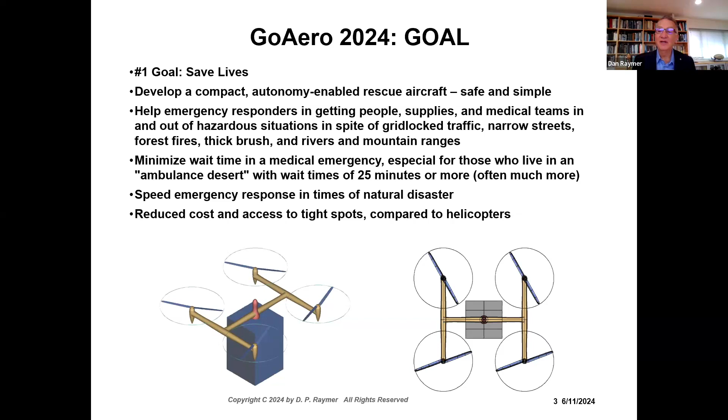And of course, the obvious comparator is helicopters. I spend my summers in Sweden on an island, and the only access in an emergency is helicopters. I often get an air show with helicopters flying right over my house on their way to pick somebody up. Once they had to pick up the next door neighbor, an old fellow with heart trouble, at 3 o'clock in the morning. They were hovering over my house at something like 20-meter altitude, very low, blowing all the leaves around and waking us up, with lights everywhere. They were looking for a place to land and literally couldn't do it. I ran out in my pajamas and made arm motions, waving them toward a parking lot where I knew they could probably land.

So anyway, it sure would have been nice if they had some way of getting into that area. This is one of the scenarios: trying to bring somebody in from under a forest canopy, which was the problem over in Sweden. You have somebody who needs help, and some kind of VTOL vehicle, but you have trees in the way. So you want something that can go around and hopefully land near the person, not on top of them. That's the basic idea.

Drowning victims, douse a nascent wildfire - I had to look that one up myself, maybe you too. Not a word we always use, but it means a wildfire that's in the process of growing. So that's the kind of things we're talking about. I think you all know that.

There are 3 missions defined in the requirements, and you have to do a good job of all of them. You've seen this picture out of the requirements, and I'm sure you've been going through that probably far more than I have, so you have to design in response to those missions. You probably saw this also, but the ground vehicle is part of the whole competition, and coming out of the ground vehicle and setting this thing up for flight is a part of the competition. So it's not just the flying machine.

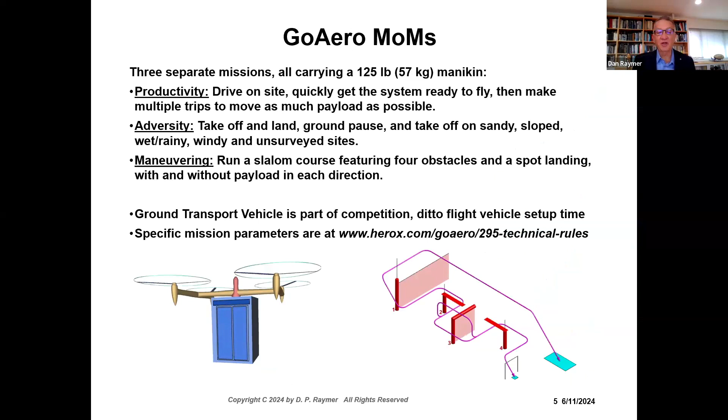Okay, design process and sizing. I did show this chart last year - I don't know if any of you were looking at it, but this is kind of how we do these things. We start with objectives, missions, and design requirements. We also gather a whole lot of information. Let me see if I can get a pointer going here.

We also have a lot of information gathering that we have to do before we can seriously start designing. Then we start designing, we look at concept sketches, we make some calculations. It might be just pure statistics, or it might even be a smart person who says well, it's going to weigh about this much. Or we can do some math, which maybe is a better idea. But somehow we come up with an estimate of the vehicle weight, and that includes the actual mission sizing. It includes calculating the thrust to weight required, the power required from that.

TLAR, that's an acronym for 'that looks about right.' And if you have somebody very experienced on the team, sometimes it's better just to start with something that looks about right. Then, once you have an actual design layout, even if it's wrong, you can analyze that and optimize it.

So the next step is to actually get an initial design layout, whatever design we think will work. In fact, it's a good idea to have 4 or 5 different designs when you start out. Don't start out thinking 'I know what the right answer is.' Start out thinking 'well, I'm not sure what the right answer is.' Let me look at 3 or 4 options, maybe 5, maybe 6.

This is an actual scaled layout, properly scaled. These days it's always in a CAD system, always in full scale, but all the parts are the right actual size. And you need the major parts.

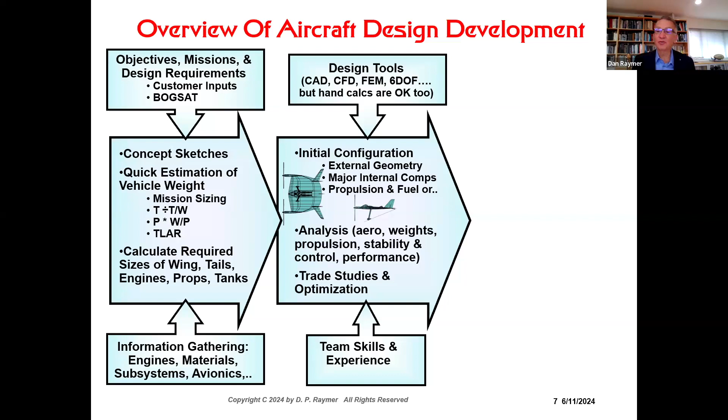You also need to input your team skills, and hopefully you've got some people with skill. And if not, hopefully you've got some people that can learn from history and read and find out what's worked before and what doesn't work. Don't be limited by what's worked before, but don't be ignorant of it either.

And then from that, you come up with a final concept, you redesign it, do a final pass of analysis and that sort of thing, and build it and test it. And of course, you need to have a fabrication shop.

During the design process, you have to have a pretty good idea of what you can make. It doesn't do any good to come up with the very best design ever if your team cannot make it in the time allocated. So you need to be pretty careful of that and have a good idea of what you can make. You might prefer to use all composites, but you might not have the ability to make it—but you can buy some sheet metal tools and make it out of sheet metal. That's going to drive your answer. Find that out early in the project, not towards the end.

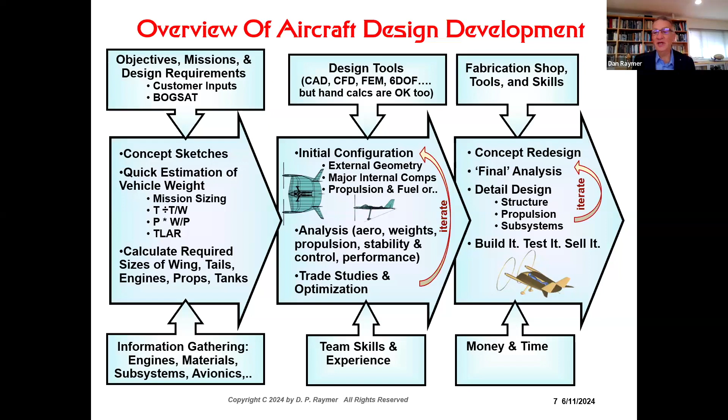And of course, you've got to put a lot of money and a lot of time into it. So that's basically the design process that could be applicable to really any type of aircraft, but certainly this one. Okay, I want to talk about sizing.

People who aren't in the aircraft business, or have never done it before, have the idea that you draw something really cool looking and then calculate how far it goes, how long it flies. You can try that if you want, you might get lucky. You can try that and then plan on iterating 4 or 5 times.

But another thing you can do is start with some fairly simple math that'll tell you about what the aircraft should weigh to do the design mission. Now, it's doubtful that very many of you are going to look at a fuel-burning option, but if you do, this is directly appropriate.

But even if you're going to be using an electric option for your propulsion, let's walk through this because I can show the sizing method and then I can show how it's different for electric. You'll go, oh, okay, that's easy. You make this small change.

So for a fuel burning aircraft, we start out with a very simple equation. The takeoff gross weight W0 is the crew weight plus the payload plus the weight of the fuel plus the empty weight. And to get an easy equation we can solve, we assume that the fuel weight and the empty weight can both be expressed as fractions. So there's a fuel fraction, WF over W0 times the takeoff gross weight, that gives you the fuel. Empty weight fraction times the takeoff gross weight gives you the empty weight.

Okay, so that makes a simple equation and it's now easy to solve. I just move stuff over and divide, and I wind up with an equation that's the takeoff gross weight is the weight of the crew plus payload, whatever you're carrying, divided by 1 minus the fuel fraction minus the empty weight fraction. When we talk about electric aircraft, it'll look just like this, but that fuel fraction term will be replaced with a battery fraction term. So hang on for that, we're going to talk about it.

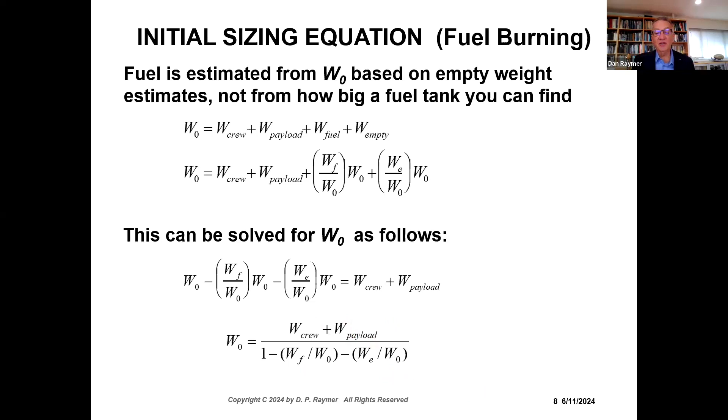All right, so where do I get the fuel fraction? Where do I get the empty weight fraction? Well, the empty weight fraction is primarily found from empirical methods, basically. Before you've drawn the airplane, certainly, you can't add up the weights of the parts. You haven't even drawn them yet.

There's something called minimum gauge structure that impacts this. But the biggest thing that impacts this is that there's a lot of fixed weight items that don't have to scale. They don't have to get bigger if the airplane has to grow to get more range. So if you've got a pilot sitting there in a seat and you find that the airplane has to grow, the seat doesn't have to get heavier. The avionics don't have to get heavier. The radar doesn't have to get heavier. The engine does have to get heavier. The structure has to get heavier.

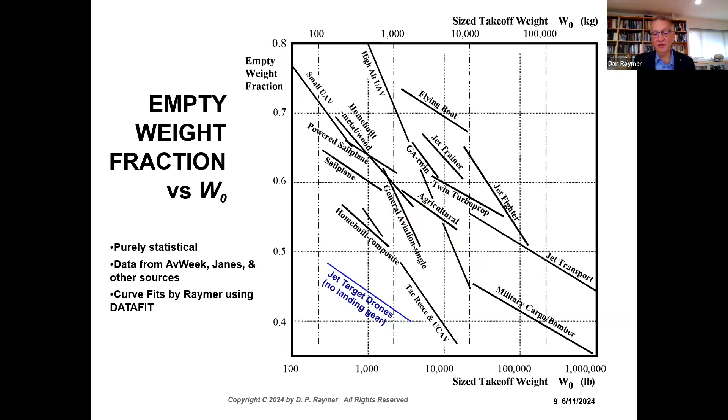And then when you've actually drawn the airplane, you can do the calculation of the components and peg a point on this chart, and use that to come up with a historical relationship. Okay, so that's empty weight fraction.

What about the fuel fraction? Well, the fuel fraction is found by going through the mission and finding how the weight of the airplane changes through each part of the mission. Again, we do this in the 5-day design class. Let me skip the details and jump to the cruise weight and the loiter weight, which are typical. There are all sorts of different mission segments, and you can find out about those later, but I just want to give the flavor of it.

Anyway, when it comes to the cruise weight, we're looking for how the weight of the airplane changes. So we have some ratio of the weight after the cruise in the numerator, divided by the weight before the cruise in the denominator. And we find this equation by going back to an old equation called the Breguet range equation.

This was derived about 100 years ago, and it gives you the range if you know the velocity, the engine's fuel consumption—that's specific fuel consumption—the lift to drag ratio of your airplane in forward flight, and a log of the weight ratio, how the weight changes during that cruising portion. We simply solve for that weight ratio. That's where this equation comes from.

So we can find that weight ratio, and all we need to know is the range, this engine characteristic specific fuel consumption, velocity, and lift to drag ratio. And of course, there's a lot more that goes into this, and how you get all those is another story, but we'll skip that for now. That's basically how this all works.

There's a few caveats when you're doing the calculation. Make sure you're using consistent units. And if you're using metric units, make sure that you take into account the difference between mass and weight, of course, which is a force. We often get those confused when we're talking in metric. You shouldn't, because metric is better—it's in the British imperial units where you have pounds force and pounds mass. The confusion in metrics is you have to make sure you put in that 9.8 factor in the right place.

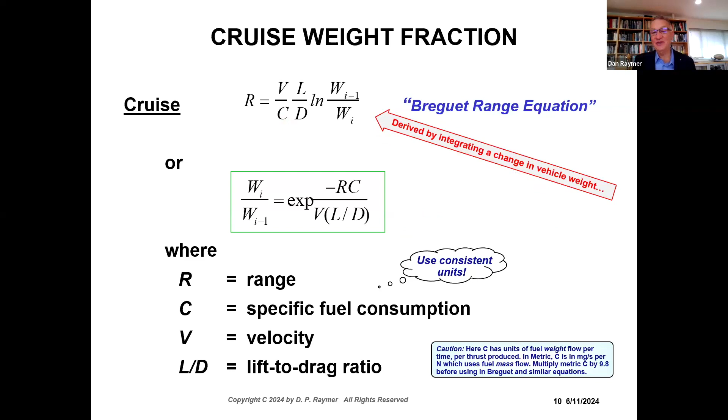Okay, now notice that this cruise Breguet range equation is found by integrating the change in vehicle weight. When we get to electric aircraft, the aircraft weight doesn't change, so you can't use this equation—that's the big difference. But otherwise, it actually looks very similar to this method. So that's the basic sizing process.

Okay, so thrust. Thrust matching—we're trying to find the thrust required in flight. For a normal aircraft, there's cruise and climb, which typically are the worst case. For a vertical takeoff aircraft, you also have the thrust to weight required for vertical flight.

So in cruise, a very nice equation—a lot of people don't realize, but if you think about it, thrust equals drag in cruise, and lift equals weight, and I can combine those two equations. I get a very interesting result, which is the thrust to weight required in cruise is 1 over the lift to drag ratio required in cruise.

And you get the L over D from a very detailed aerodynamic analysis, but there's also a rather simple method. I didn't bring it today because I just don't have that much time. But if you go to my book or my short course, you'll find this very simple method of estimating lift to drag ratio in cruise. And once you know that, you know the required thrust to weight in cruise.

For climb, you have to add the component of the aircraft weight vector in the thrust direction. So you make a little vector diagram, a little picture of an airplane, and you find that the thrust now equals the drag plus the weight times the sine of the climb path angle.

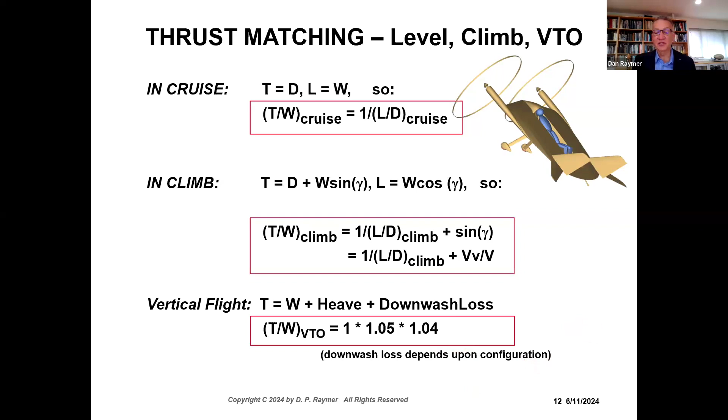Okay, I'll talk about propellers. There's a common misconception or misstatement that a propeller turns power into thrust. That's ridiculous - the units are wrong, it's apples to oranges. Instead, a propeller turns power into power, from the shaft power of your motor to thrust power, which is always force times velocity.

We don't do a perfect job, so there are some losses as we do that. So we've got this invented term eta sub p, which is basically just a loss factor. It says my propeller throws away some of the power of the motor, so I get a little less thrust power out of that. So we solve this equation for thrust - you've all seen this before. That's where this equation comes from. It's nothing fancy, it's just pure physics of turning power into power.

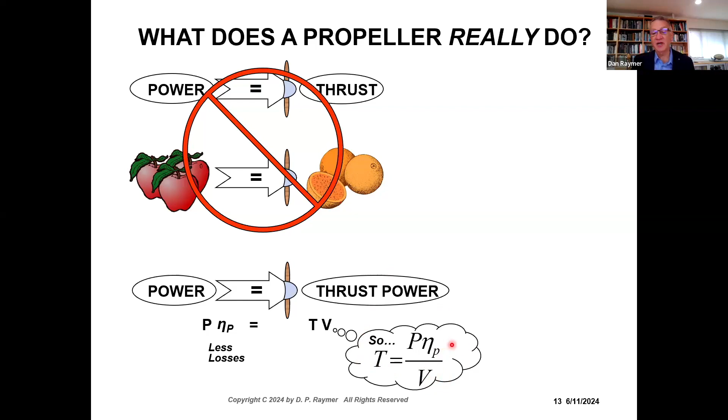The obvious problem here is in the denominator, this velocity term. The faster you go, the lower the thrust. That's why propeller-powered aircraft don't go that fast, because as they go faster, they get less thrust. Even if the efficiency is ideal, even perfect, you still lose thrust with increased velocity. But in the real world, when you get fast, especially near the speed of sound, the efficiency drops as well. So this is why propellers don't do so good near the speed of sound, and you've got the combined effects.

So how do we calculate that? Well, there's a bunch of historical data, test data, tons and tons of it, so you don't have to reinvent this. You can go into test data, and there's various charts and graphs. You have to read the chart and graph to find out how to use it - it's like a little cookbook. It says calculate one magic parameter, read off here, it's another magic parameter, solve for what you're looking for. It's not that hard. That's what you do in forward flight.

You can also, of course, write equations. There's various software you can find that does a good job. Now you can design a better propeller - you can actually do better than these historical terms. If you design your own propeller and you know what you're doing, do watch out: a lot of times propeller codes wind up being a little on the optimistic side compared to what you actually get when you build it. And you have to build it perfectly, with no other factors that you didn't think of.

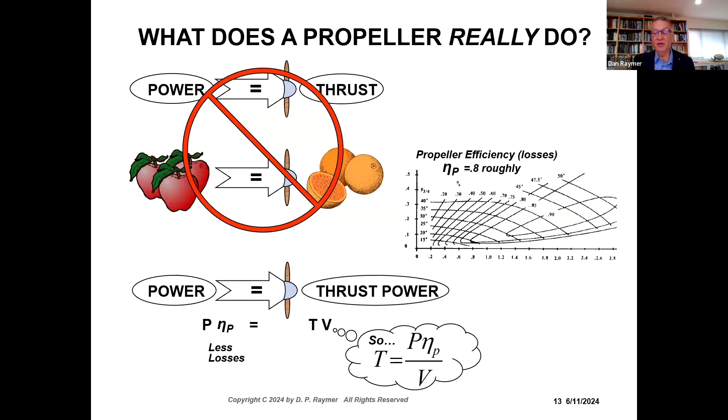And there's all kinds of extra losses that might not be included, nacelle blockage terms and things like that. So be careful, but typically this is how you calculate it.

Now, if the velocity is zero, you have another problem, and that is that this implies the thrust goes to infinity. Go back to here. This equation, velocity 0 means thrust is infinity. That's not going to happen. So something different is going on.

Basically what's happening is that the physics changes. At these very low speeds, the propeller is actually pulling air into itself, just like a fan sitting on your desk on a hot summer day. It pulls air into itself. So the velocity isn't ever actually 0. So this equation isn't applicable at 0 because the velocity isn't 0.

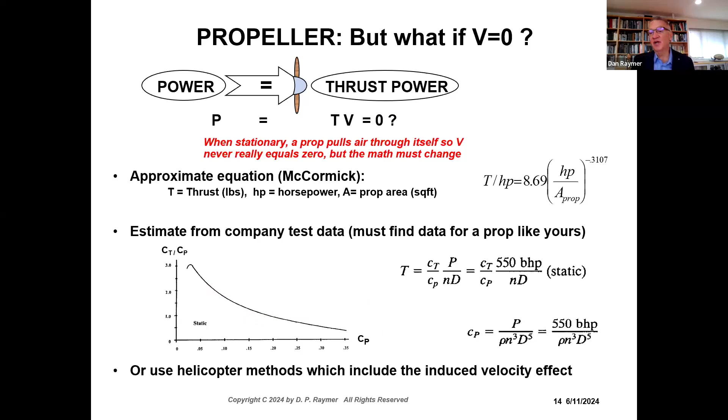So you can either use test data—there's all kinds of charts and graphs that show you what static thrust you get from a propeller. This is typical, it's the one I typically use. Or you can use more complicated methods developed for helicopters, where they actually include the induced velocity effect and solve from that. A little more complicated, not necessary. Anything over about 50 knots, you're just fine with the usual forward flight equation. But if you want to go static, like anything hovering, then you've got trouble.

Okay, ducted fans. People like ducted fans a lot. I'm kind of running out of time, so I don't want to spend too much time on it. But the basic problem with ducted fans is the efficiency gain you get compared to an unducted propeller is only true if you have the same diameter. And a lot of times people forget that. They show a little ducted fan like this and think it's going to have the same efficiency as a propeller that's this big. That's not true. It'll have less efficiency, much less, depending on the circumstance, of course.

So you have to watch out for that, make sure you're not fooling yourself. And also in forward flight, the benefits of a ducted fan tend to go away because of the drag and other effects of the duct itself. And also you have the weight of the duct. So I'm not saying don't use ducts. I'm just saying be careful, know what you're getting into, and know what the problems are.

It's difficult to manufacture and operate a ducted fan because the clearances have to be extremely tight. You're building up high pressure behind the duct. If the clearances aren't tight, a lot of the air just zips forward around the propeller, and it's a loss. So the clearances have to be very, very good, which means this has to be very well constructed, very well stabilized in its central location.

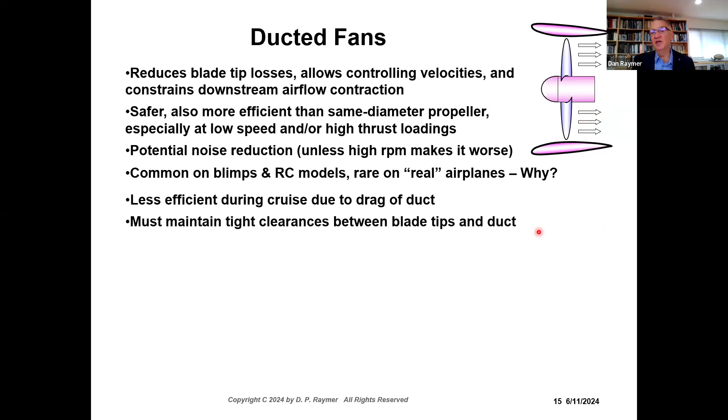I saw one guy that took a propeller and got a plastic garbage can and cut a ring out of it and stuck it around with a huge gap, and showed it to me very proudly, saying, there, I'm going to get more efficiency from that. No, you're not. No, you're not.

Okay, so anyway, my opinion, in forward flight, the ducted fan advantage disappears by 100 knots, and maybe 50 if everything is considered. Now that's for a big aircraft. If you're doing little model aircraft, there are other advantages. I won't go into it too much.

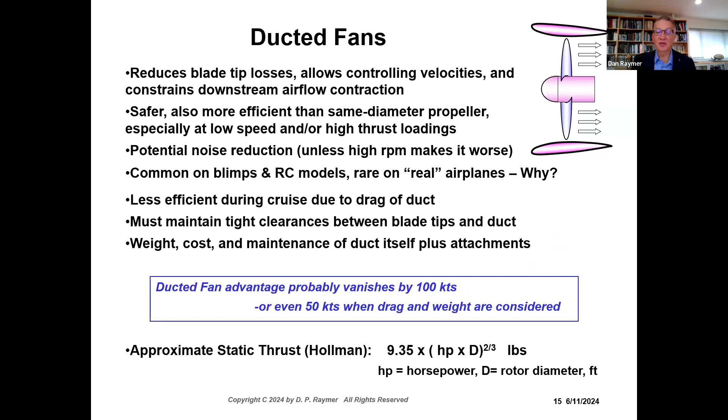Hollman's book has a static thrust approximation. I don't know where he got that, but Hollman's a sharp guy, so it's probably usable.

All right, electric aircraft analysis and sizing. Let me talk about that and show you some of the equations and how this differs from a fuel-burning aircraft.

Why do we like electric power? Well, about 20, maybe 25 years ago, I put this chart together. It was maturing fast, it's still maturing fast. It's not as far as I hoped we would be by now. Most of the difference from what we hoped 20 years ago to what's happening today is in the batteries. The batteries are much better, but we were hoping for even more. We'll get there eventually, but it's tough to really put a lot of energy into a battery without other things happening.

Okay, but other than the power supply, I made this little gag cartoon here 20 years ago showing the big problem is that extension cord. But otherwise, we love electric motors. They're very reliable, they just last forever. They're very smooth, they start up, they don't worry about icing or things like that. There's a lot of good reasons for it.

The motors themselves are very lightweight. They're actually very efficient. The electrical power that they get, they lose very little of it in delivering it to the shaft. Then, of course, you still have the shaft to propeller connection. The propeller itself loses some of that power, but the motors are very efficient at delivering power to the shaft.

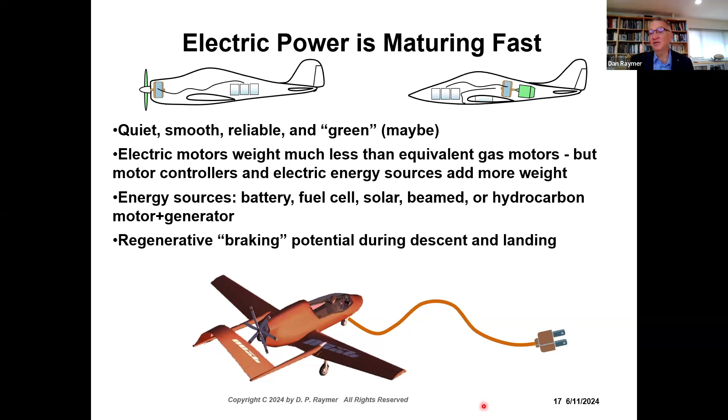There's also a possibility of regenerative braking. You could possibly run those as a generator and stay high all the way until you got to your destination, then dive down and gain back the energy needed for landing. Maybe—at least the words are there. It might be possible. Okay, but the problem is the power supply.

And here's another old chart. This one comes from 2002. Hasn't changed all that much. We're looking maybe a little bit better—I've added these dotted boxes. I think we're about that much better.

But you also have to really watch out when you're talking about a battery, because you'll very often see some great announcement—a startup company or a college professor has come up with a great new battery technology—and they tell you these wonderful numbers, and it's like, yay, finally electric motors can compete with a tank of gasoline. And it turns out that was for a single cell, not a fully installed battery. It didn't include the casing, didn't include whatever electronics are required. And by the time you put all that in, oh, and it was optimistic also, by the time you put all that into an actual battery, it's, if you're lucky, an incremental improvement.

We're still not seeing that great breakthrough. If we get even 500 watt hour per kilogram in the actual installed battery, with everything taken into account, that'll be wonderful. And if we ever double that, that'll change the world. But as of now, it's still not really competitive.

By the way, the comparison with gasoline here includes the knockdown for the internal combustion losses. So that's basically delivered shaft power coming out of a tank of gasoline, not the actual chemical content of the gasoline itself. And a tank of gasoline is far better than anything from batteries. So just watch out for this.

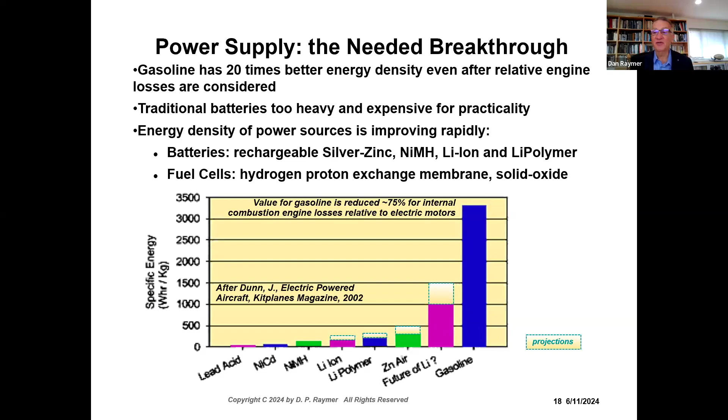Okay, range and sizing and actual calculations. First of all, as I said, you cannot use anything like a Breguet equation because we're not integrating a change in weight. I mean, Einstein says there's a change in weight, but not enough to integrate.

We can do this backwards. As I said, you can just sort of eyeball something. You can pick a motor—gee, I like this motor. You can calculate the weight to motor ratio. This is like a ratio, the takeoff weight to power available. And you can compare that to history and sort of pick one from history.

This then will tell you what the weight has to be. If you've already picked the motor, you know the power, you pick this ratio, and it tells you what the weight has to be. Draw an airplane from that weight, analyze it, see if you get the range you need, and if not, change it. You can do that—there's nothing wrong with that approach. Sometimes I do just that when I'm in a hurry.

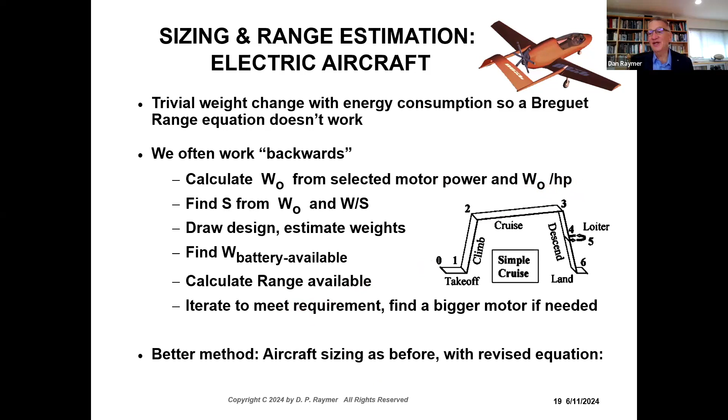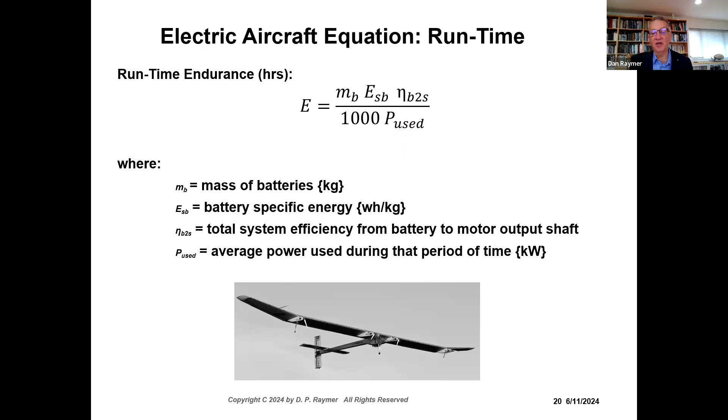I can do the same thing for level flight. I can calculate the range I get by writing down the equations that tell me how long it takes to go that far. And then I go back to this endurance equation to calculate the power setting required for cruise, and if I take the power setting required for cruise, put it in that previous equation, solve for terms, I can get the range out of that aircraft.

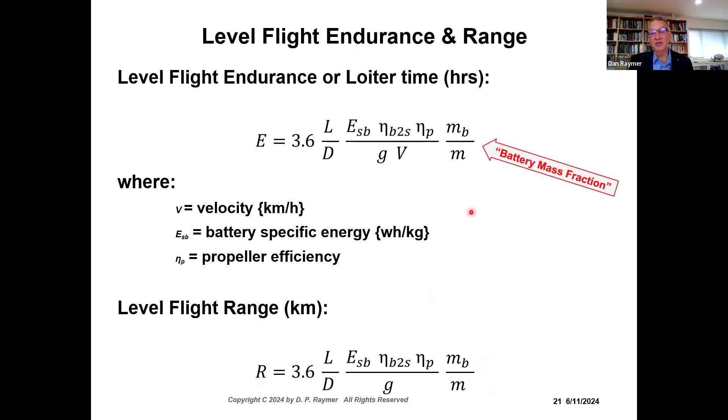And once again, I can collect terms and I get this ratio, battery mass to vehicle mass. This MB over M we call a battery mass fraction, and I can turn that around and solve for the battery mass fraction. So here it is solved for loiter, here for cruise, here for climb, and I can solve it for other things—I can solve it for hover, or just basically solve it from the runtime equation, power setting required.

So from the combination of battery mass fractions, I can combine them together into the complete aircraft battery mass fraction. And I start with a completely different derivation, and I wind up with this equation for the takeoff gross weight. This is the sizing equation for battery-powered aircraft, and it looks just like the fuel aircraft. It's derived in a completely different way, but it winds up looking just the same. Of course, the fuel fraction is replaced with the battery mass fraction.

Here's the peculiar thing: when you go through all the equations, you realize in this case the battery mass fraction is not the product of the individual terms, it's the sum of the individual terms. So you find a battery mass fraction required for loitering as long as you want to loiter, for cruising as far as you want to cruise, for climbing, and anything else like hovering, and you add all those together, and that gives you this battery mass fraction. So that's how you do the sizing for an electric powered aircraft.

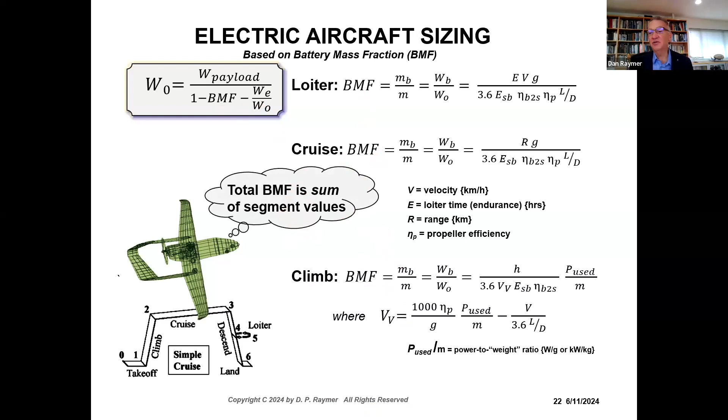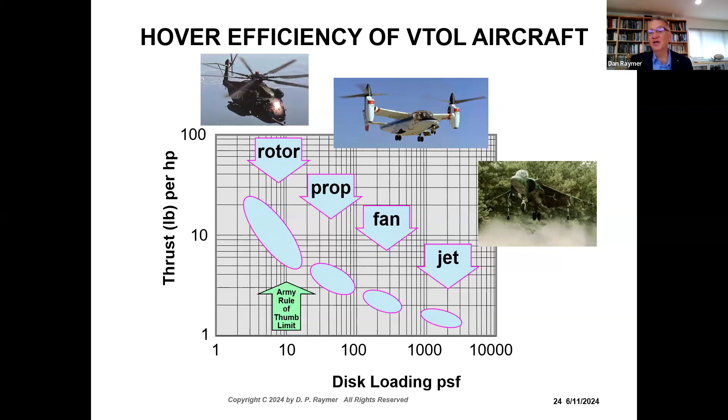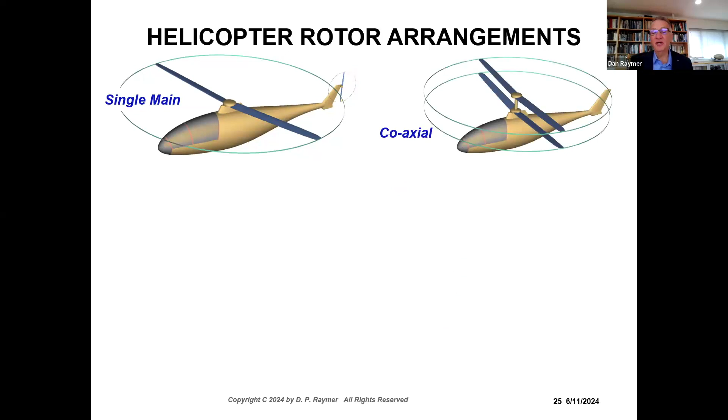Various different helicopter arrangements. A single main rotor tends to be the lightest weight and probably the most efficient. The problem with a single main rotor is that you've got to do something to take care of the torque. When you apply power to rotate the rotor to the right, the nose of the vehicle goes to the left, or vice versa. You typically lose a lot of your shaft power spinning this little tail propeller to provide a moment - something like 10, 15, 18% of your power. So there have been other approaches to avoid that: coaxial, tandem, side-by-side tandem. They all try to avoid that problem, but they all have their own new problems, extra weights, efficiency losses, etc. I think the single main is the winner in the end, and the vast majority of helicopters have been single main, but there's always good reasons to look at one of the others.

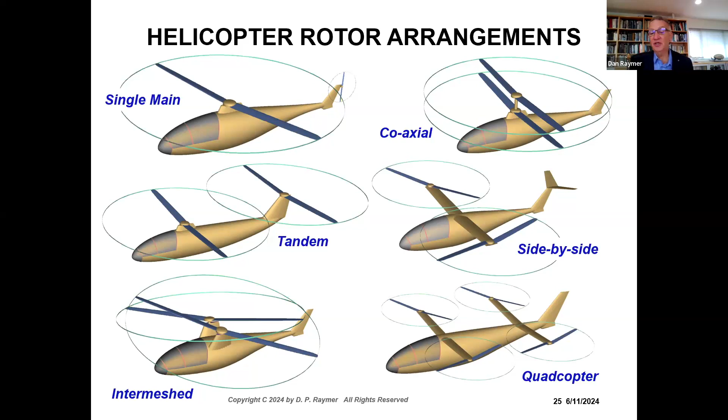Do a trade study. There's also intermeshed rotors. And there's one called a quadcopter, which has come along more recently. It's actually very old, going back I think to the 1920s. But today you see them for all the little electric powered drones, including little toys that cost 20 or 30 bucks now - it's amazing how tiny those things are. This can be used to solve that torque problem by having them spin in opposite directions. In fact, you can get the yaw you want from the torque, and it works like this.

Basically you have these things set up so they're spinning in the same direction kitty corner - the right front and left rear, and the right rear and left front. If you increase the power on this pair and reduce it on the other pair, you yaw to the left and vice versa. You get roll, pitch, and yaw by changing the amount of thrust going front, back, left, right. If you don't get enough yaw - which is likely if you have a big tail in back and a wind blows you - you can put these things at very slight angles from the front that give even more yawing authority, with only a very slight loss in vertical thrust. So this is a very common thing that we do now.

If you want redundancy, and you probably do, you can either have 8 of these things scattered around the vehicle on completely separate power supplies, or you can stack them vertically, having a quadcopter where each rotor is actually two - one on top and one on the bottom. That's also a very common arrangement.

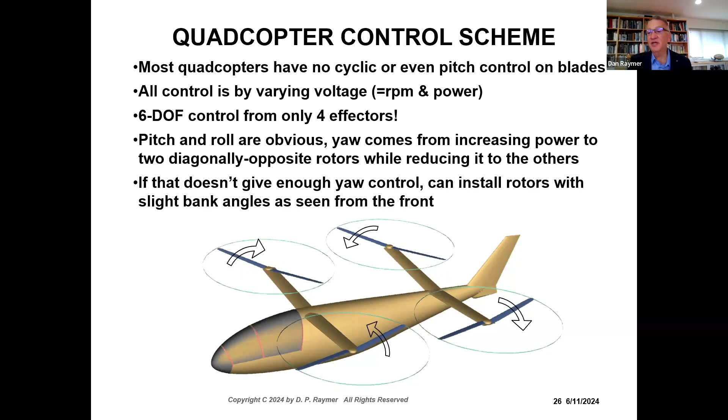Last time I looked, somebody had a patent on that and they were enforcing it. I can't imagine that's patentable, but you never know these days. So watch out if you're going to start your company - make sure that isn't a problem. And by the way, if anybody knows if that's not a problem, let me know. Send me an email, because I haven't seen where that's been resolved.

We can rewrite the equations for thrust, as I said, in a form that doesn't have a problem when you get to zero velocity. So what we have to do is take into account the velocity. And here I have just an arbitrarily chosen name.

I call V1 the velocity right at the disk. V0 is far above, and if I'm hovering far above, it should be 0. And down below is some downwash velocity, V2.

I can go through the usual development where I'm setting the thrust and kinetic energy and equating, go through the whole thing, and find an efficiency and all sorts of things. The one I'm looking for is down here. I can calculate the thrust, determined by that velocity induced right at the disk.

And I can solve for that velocity. It sounds like a weird way of doing it, but I can solve for that velocity, and that tells me what that velocity has to be for a given amount of thrust divided into a given rotor disk area.

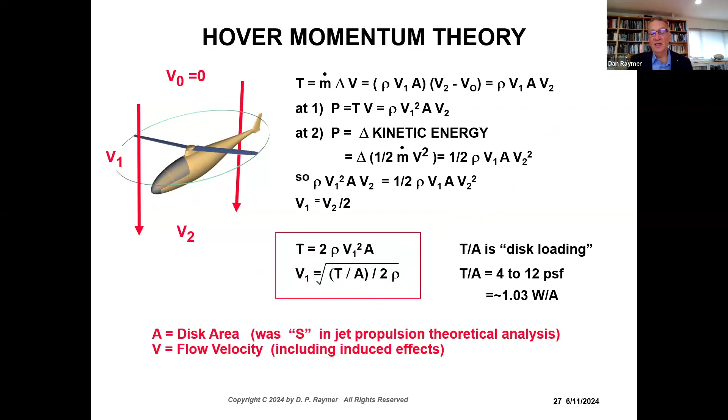And then I can use that to calculate the power required. So I wind up getting the power required as thrust times velocity, and it looks like this. And if I'm hovering, my thrust has to be about equal to my weight.

So we can now calculate the ideal thrust. This very simplified analysis doesn't take a lot of things into account, but it's a very common classical analysis. And typically you get 15 to 20% less thrust. 17% is a good approximation, less than predicted by this method.

So just knock it down, or increase the power required a little bit, and that'll tell you how much power is required for hover. Add to it to take into account that 17%, add to it for the downwash that we talked about, and add 5% more for vertical acceleration.

It doesn't do this helicopter any good to hover. He wants to go up. So you need 0.05 G extra thrust to go up.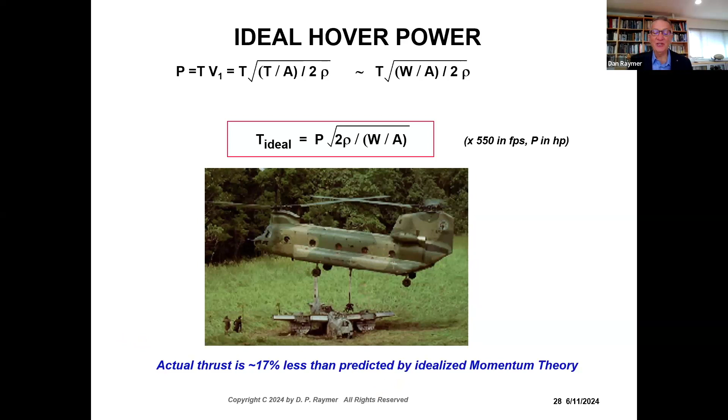In forward flight, you can actually treat a rotor or disc, or some kind of helicopter vehicle, like an airplane. If you're moving fairly fast forward, then the disc of the rotor actually acts like a weird wing.

There's oncoming air, the air is turned downward, there's a downwash behind it, and there's a lift distribution across the rotor disc. If you kind of squint, it's a round wing.

So you can actually apply the same methods we use, including Oswald's efficiency factor. The aspect ratio, do the math, it's 4 divided by pi. And typically your equivalent Oswald efficiency is pretty terrible, around 0.6 to 0.7.

So you can use, I don't know, I'd use 0.65 maybe as your Oswald efficiency factor. That'll tell you what the drag is in forward flight, and you can calculate the power required. Then you also have to assume some losses equivalent to propeller losses to get thrust in forward flight.

And it turns out the rotor acts sort of like a forward-facing propeller. The forward component acts a little bit like a propeller with an efficiency, something like 0.7 or so. So you can actually use simple airplane equations to calculate power required in forward flight.

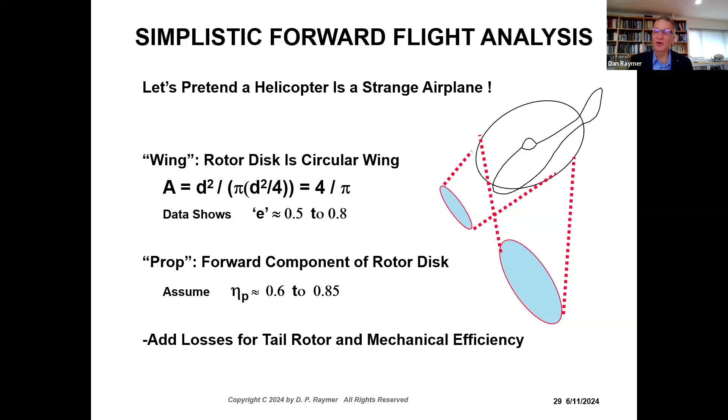Add some more losses if you have a tail rotor, and any mechanical efficiency losses you might have, but it's a very crude way of doing it. Of course, hopefully you're going to have some smart people with smart tools do a better job. But in that early knock-out-some-numbers phase, this is pretty good.

All right, well, that is the end of the material I was going to show, and I'm very happy to take any questions now that you might have.